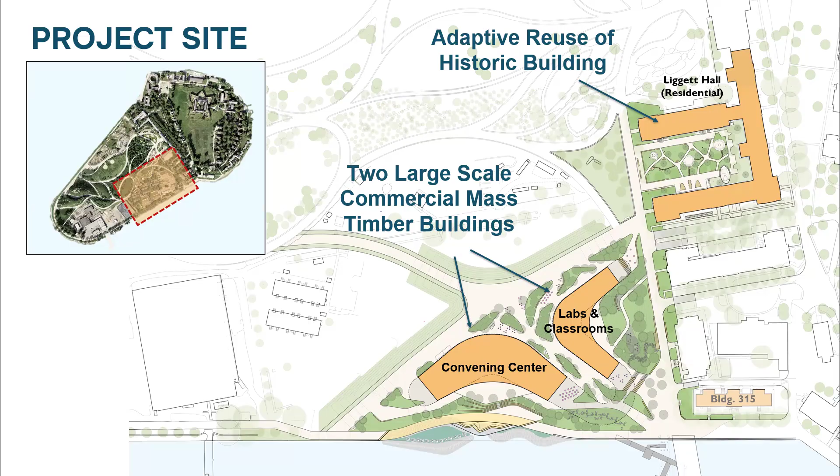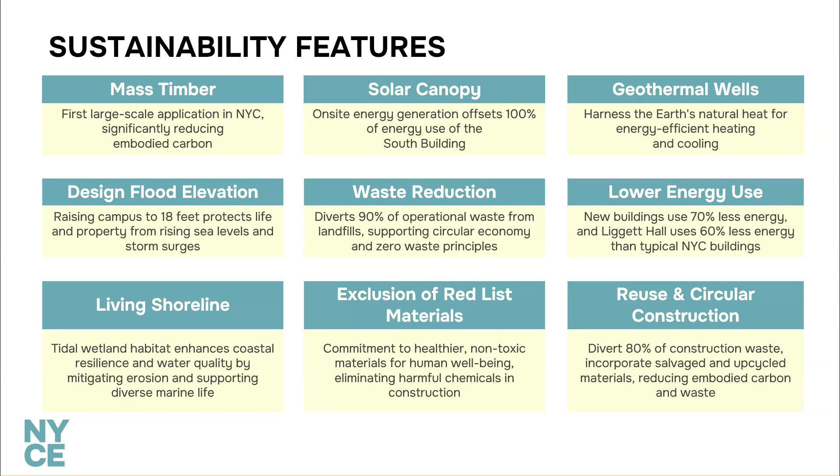We're doing Living Building Challenge, True Zero Waste, and the Waterfront Edge Design Guidelines, which create a holistic approach to building an example of what urban or regional resilience could look like at the waterfront. Most of the presentation today will focus on LBC, but these are also just part of the puzzle for us—we're doing a couple other certifications too.

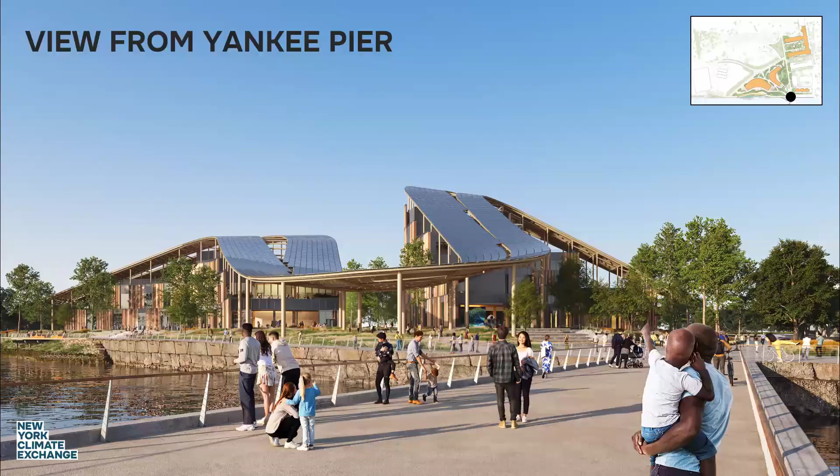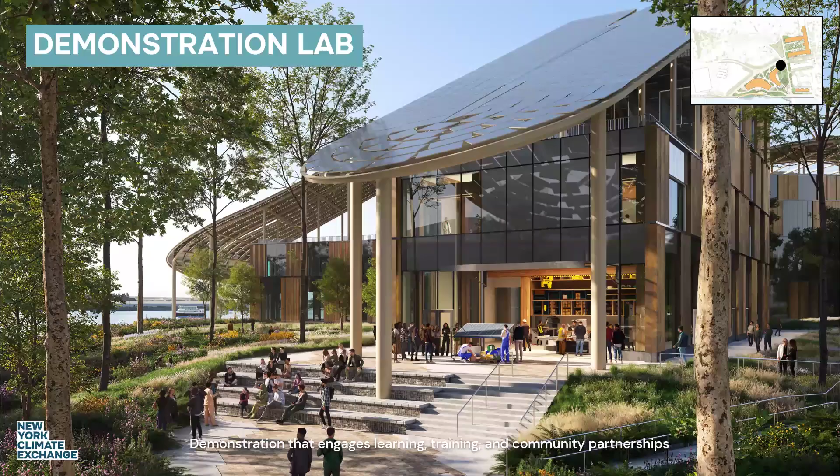Here we can quickly tick through these renderings of our project. We sit right at the pier where you'll arrive on the island—this is the convening space, the collaboration space I talked about. Our building is made out of mass timber. One thing we always like to say is that if you're in the convening space and it feels like you're at the 53rd Street Sheraton in Midtown Manhattan, we didn't do a good job.

Same with engaging the public at the ground level—visitors on the island who might not know anything about us. We want a porous ground floor to engage people just visiting the island, and hopefully entice them to stay a little longer. This is the academic courtyard. What you see here is a historic structure that will be renovated—it used to be army barracks, and inside it will become student housing and communal spaces for student life.

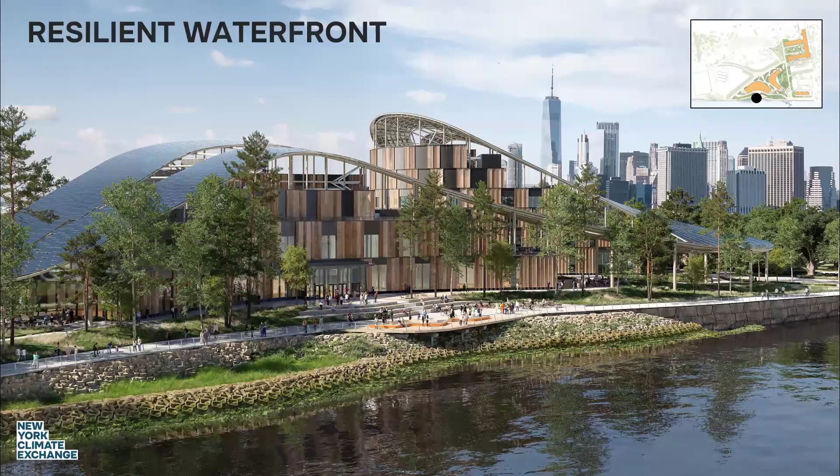This is a nice hero shot that I like because it shows this resilient waterfront that we're building. It'll be the first place on the island that breaks through the existing seawall that's there. We're not going to solve sea level rise with this patch of land, but we want to be an example of what development might look like at the waterfront. You'll see here the steps—we are elevating the campus to 18 feet above sea level.

So we're hoping to build a structure that's resilient over the next many decades to come. I think this is the last slide of the intro. I'm sorry, this has probably already taken up too much time, but it's always so fun to talk about our organization and our campus. But really, what we're here to talk about today is how we move from some of the goals and visions that our organization may have to action.

The New York Climate Exchange is focused on three goals. One is to drive innovation and scale climate solutions. Two is to really do it in a replicable way—we don't want to be scaling things and be the only one standing on the other side. We want others to follow the path that we're forging, so creating a replicable way to do it is really, really key. And then also inspiring and educating.

I think this really builds off of the energy of Governors Island already. You have to take a ferry there. When you arrive with a sense of accomplishment—like you made the boat, you didn't miss the journey—you arrive there, and it's like a portal where you arrive with your heart and mind open, I think. So we want to tap into that energy and really use this building to inspire and educate people about what is possible. We're going to talk about a couple of the ways we bring those goals to action.

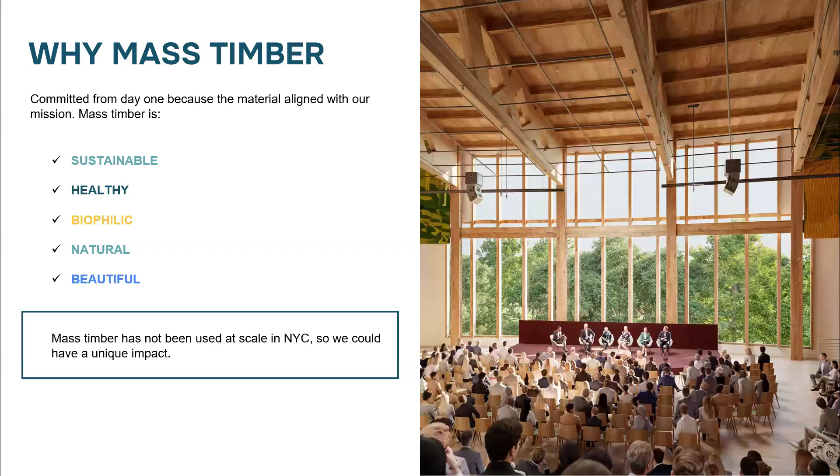Some design considerations were definitely discussed up front with mass timber. Considerations that were prioritized were really around circular building design as well as optimizing people's experience with the material—thinking about designing key assemblies for future disassembly, helping to extend the life of building components, and reduce waste, hopefully ultimately at the end of the building's useful life.

And if you click to the next slide—one more thing I'll say is that less is more was another one of our design principles: let's let the material we're selecting with intention shine, which is why these renderings are so heavy on the mass timber, and you see there's no drop ceilings. We will have some of those for code compliance, but we're really letting the material speak.

The team really sought to maximize people's experience with the material, as I mentioned, creating ground floor views of mass timber, allowing occupants and visitors to really connect visually with the warmth of the wood.

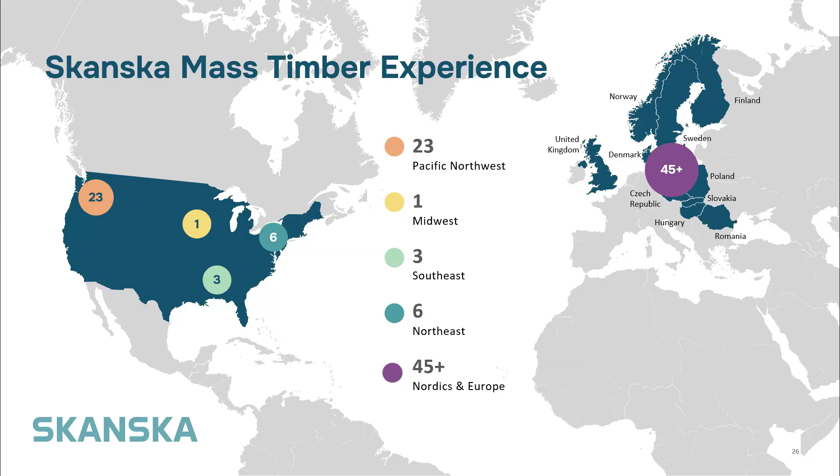Just quickly, I know this whole presentation is around innovation, but mass timber alone isn't super innovative. It's widely used around the world as a climate solution, and Skanska has built several mass timber buildings in the US and in Europe. But the innovation here is that New York City doesn't really allow for mass timber at scale.

So the innovation work here is really working through those regulatory hurdles of actually building mass timber in New York City. I won't get into all the specifics, but New York has a very conservative building code related to mass timber.

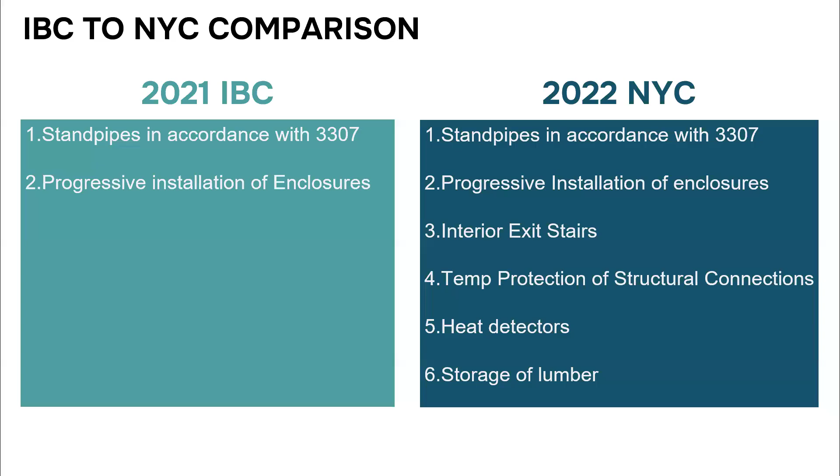I'll give some examples in a minute, but wanted to note this was the crux of what we were solving for when we engaged with the New York City EDC Mass Timber Design Studio. This is a program facilitated by New York's Economic Development Corporation and other partners, grounded in a commitment to advancing mass timber adoption in New York City through demonstration and technical innovation, public outreach, and structured engagement with regulators.

Through the studio, we were able to engage directly with city agencies, designers, and other partners to really navigate the complexities of New York City's permitting and regulatory framework for heavy timber construction. This provided direct coordination, strengthened coordination with the Department of Buildings and the fire department, really trying to advance practical solutions to implementing mass timber. One of the things we came away with was greater regulatory clarity and technical confidence from a lot of these conversations.

Most of what was discussed in the studio really related to two key regulatory components: the New York City code requirements above and beyond IBC code requirements, and the code's Chapter 33 safeguards during demo and construction, which is essentially how you can build in New York City with specific requirements for timber construction. Three major areas of focus came out of this for further discussion, and I'll run through a couple quick examples.

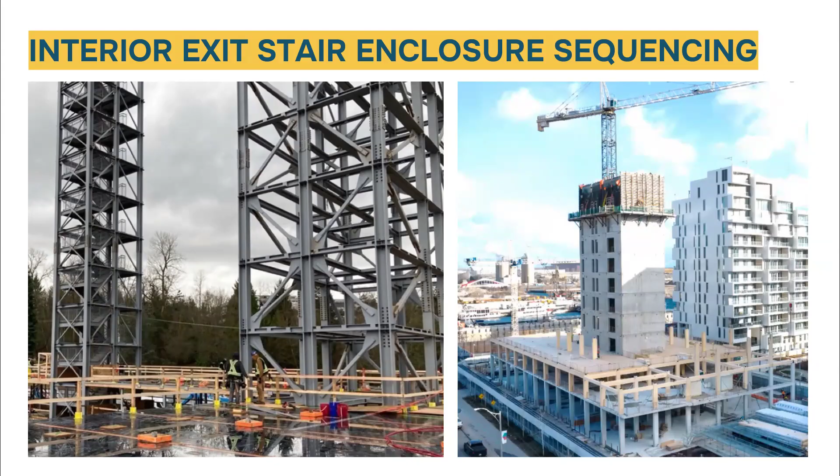The first is regarding stair towers. Our project has taken a hybrid approach where the building structure and the stair towers are integrated with one another. However, code typically requires these stair towers to be constructed independently. So this is something the project team continues to work with the Department of Buildings to discuss, in hopes that a hybrid approach supporting a more sustainable structure overall can be pursued.

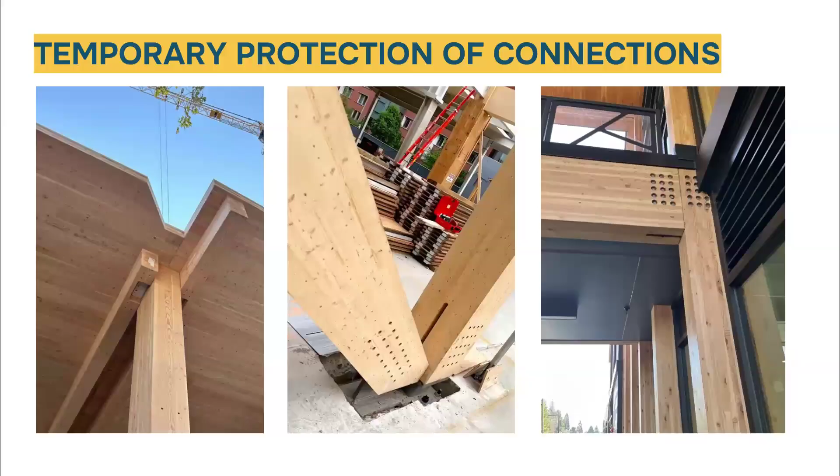The next example is related to temporary protection of connections. As written, code requires that each connection be fire protected at the end of each work shift — like fireproofing every steel connection daily if this were a steel building. This obviously presents significant constructability and sequencing challenges, and was certainly a discussion point throughout the studio on how to approach this practically. This is something we're working through with the design team, with ongoing coordination with DOB and the fire department.

The last thing I'll mention is related to storage of timber. As the code is written now, it only allows for storage of up to 1,900 cubic feet of lumber on site — basically two trailers at any given time. This is a particularly tall hurdle because we're on an island, which already limits delivery flexibility and increases logistical complexity. So we're discussing this issue, explaining potential approaches to sequencing, staging, and temporary protection, and hoping for further clarification as we progress with the project.

And I just want to double click on what you said around coming out of this process with practical solutions.

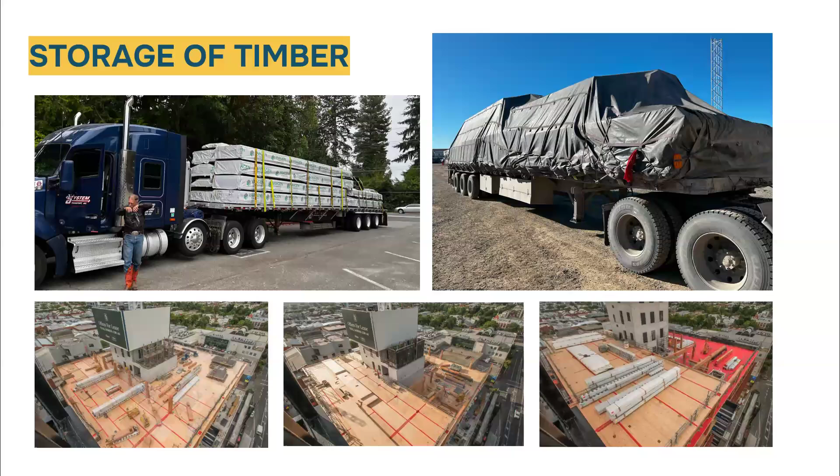I think one thing that has been clear time and time again is that for this general status quo developer to pick the sustainable option, it has to be practical, it has to be cost effective. We cannot have all these complicated rules that make building in mass timber so expensive that nobody in their right mind would build mass timber. So I think that's really what we're trying to do: we're trying to de-risk and make it economically viable to use some of these things that may be innovative only to this region or maybe innovative in general.

Great point, Elfmina. So I'm going to go into the LBC requirements, and specifically what is our project profile on LBC, and then how did we approach it innovatively.

So this is a big chart. We have 3 main projects: the south building, north building, and adaptive reuse. We are pursuing South Building full living building challenge. We won't be able to get the water petal, but we are still pursuing all of the imperatives without the water petal. Our site isn't big enough to do a wastewater treatment, and we felt like because we are on an island, hopefully the island will choose that technology in the future. So it is plumbed for that future hookup if that ever becomes available.

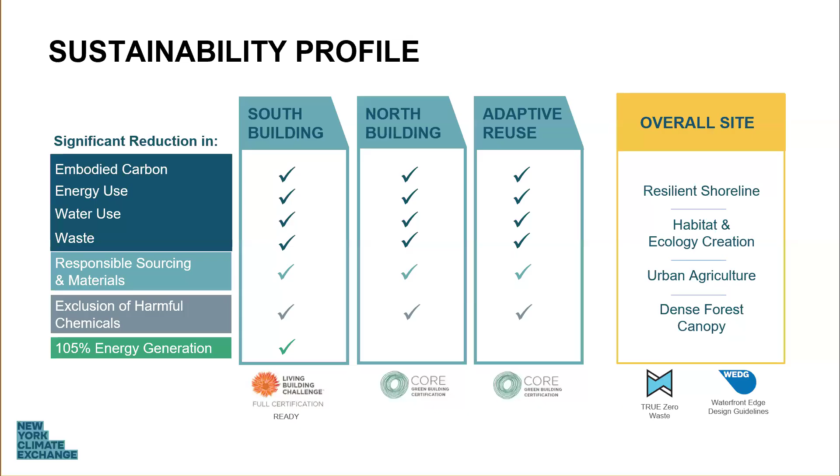So dropping down one level of what's scalable and what's innovative, the LBC pursuit asked: what is the biggest environmental offender in the construction industry today? I can remember sitting in that meeting and Andrew and Elfmina giving this question to our architect, and them being like, we like this, let's go back and really think, because for many years, probably for a decade, carpet has been the thing that our industry has attached itself to as a huge win. But what's the next product? So we challenged SOM with that question.

And this is what they came back with for what is the biggest offender: site, building, interiors. They said we've got to do this beyond the site, looking at the interiors, looking at carbon footprint, as well as the health.

Because LBC is very heavy on red list free materials. So for site, we came back with concrete paving and water usage. For buildings, of course, steel structure, concrete floor slabs, glazing exterior envelope, and then for interiors it's excessive assemblies, rapid replacement, and chemicals. Those were the biggest offenders from these 3 categories.

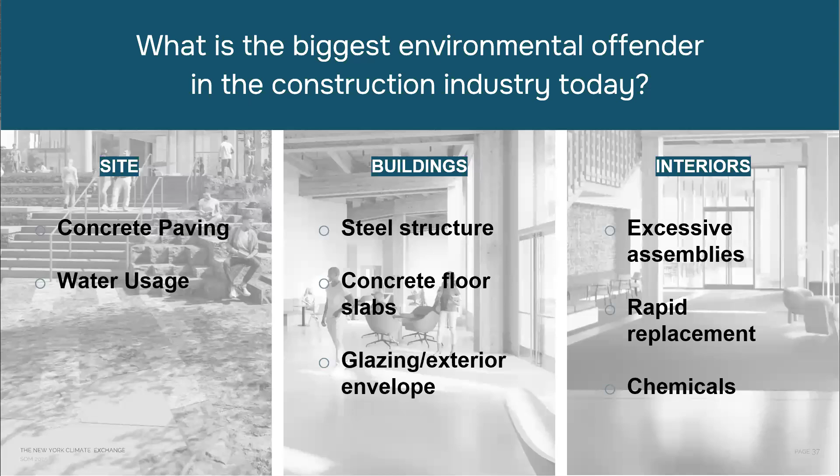Their proposed solutions for site: low carbon concrete, which is not necessarily an innovative product—over the last couple of years we've seen different iterations, which we will get into—one of those being waterfront bioconcrete, and then no plant irrigation. Not innovative, but still something important to hold on to.

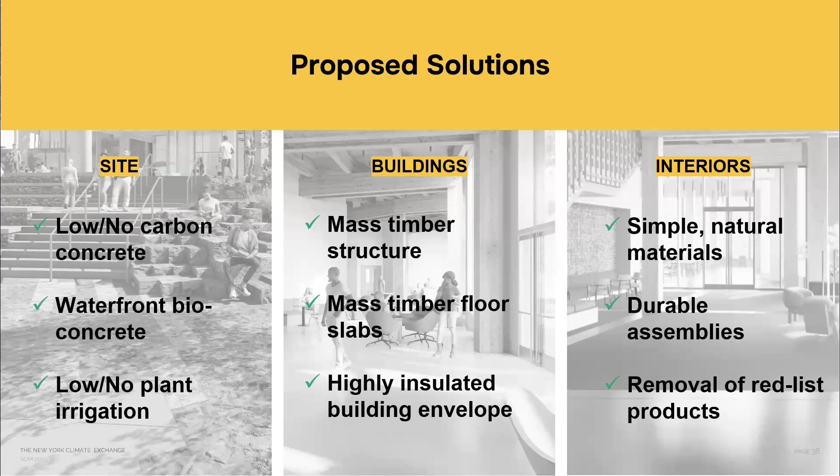For buildings: mass timber slabs, highly insulated building envelope, and then simple natural materials, durable assemblies, and we had to remove the red list products from the building. So our transparency went beyond typical product info.

Anybody that has done an LBC project, the materials—we as a team always said we had an 8-different-sided Rubik's Cube. How are we going to solve this by meeting the red list free requirement, by making sure we had declare labels, by living product challenge? And on top of that, our client is asking for innovation.

So we have had hundreds of conversations with manufacturers. This has been a very collaborative process, and advocacy has been hit hard for this project. Again, I don't think that's innovative, but I think the level to which we went to make sure manufacturers knew what we were looking for is the part where the exchange is like, yes, go one step further so that we can make this easier for other project teams.

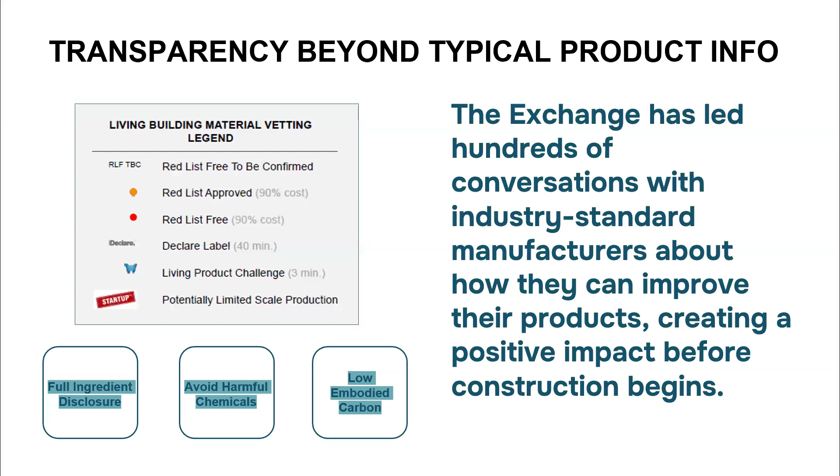Just to give you an idea of what the numbers look like: for red list compliant, we had about 1,000 products. We had to avoid 90% of red list chemical classes within our building. So you can see—you can take a screenshot and look at this later—the compliant side, the non-compliant side. We're still working through that even after CDs, just to figure out what we can do to make sure we're really meeting that 90% threshold.

Responsible wood sourcing - this is the mass timber, FSC certified. We broke it down by building. This was a little bit easier because everyone on this call has been doing this work for LEED especially, probably requesting those chain of custody certificates. So this is not as fancy.

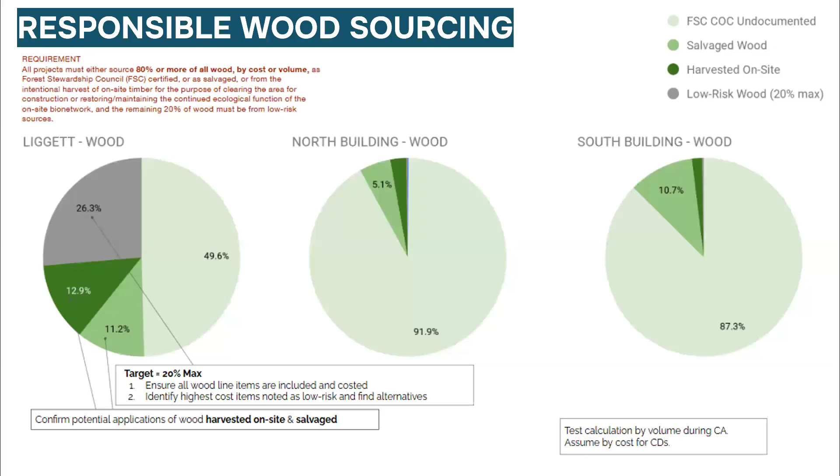This, though, is where it's really so small that you don't need to read it. But you can see all of the different products and the cost drivers that were pushing a yay or nay on if we could afford it, if it came within schedule, and then it met our requirements for LBC.

We have done a lot of vetting, an iterative process with Skanska. At one point, I think they were pulling out their hair because we were like, can you price this innovative product? But this is all to say that the iterative process was necessary in order to get to a building that does hold innovation of products.

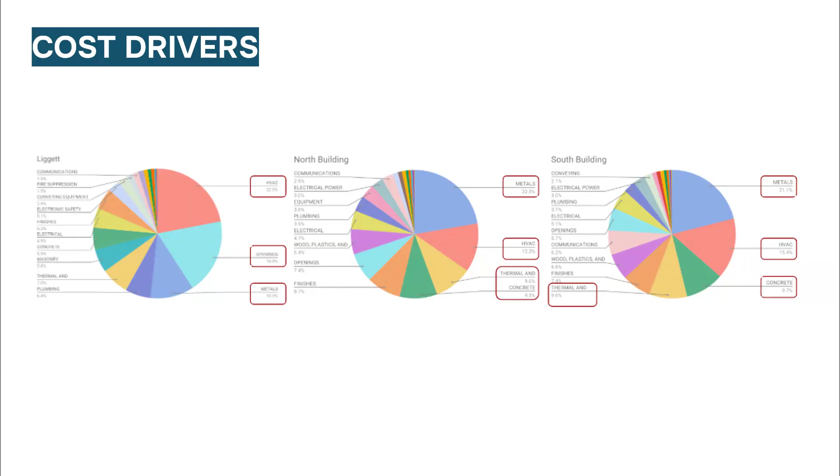So the last big part of this is specification directive - to write an open source spec, which I think hasn't really been done for LBC. If anyone's on the call that's done an open source spec, please raise your hand because we'd love to talk to you. But to have multiple products that comply with LBC requirements is tough, really tough. But we also want to have an open source spec, so we had performance. We had to really hone in our directive.

So all materials listed in the specification will be at least vetted for LBC compliance for the first four. Living sourcing, which is where the location is, was not necessarily vetted at this point in time. The second layer was products that are compliant at minimum will carry a basis of design - where possible, there were alternates listed, but at least the basis of design was vetted and compliant. And then products that are compliant with exception, which is determined by the LBC rating system, we will have three of those products listed, and we'll do the due diligence on the backside with Skanska and the subconsultant.

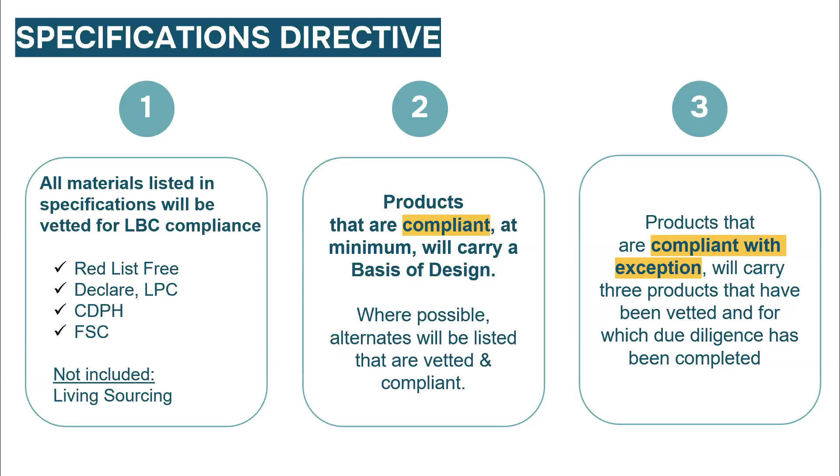I guess I'll put a bow on this - the magnitude of vetting products and innovation was a big push of the design team. But I think when you work together, especially with a contractor that is so willing to support that effort of pricing and balancing the cost and the schedule, it really can work.

I just want to reiterate, a lot of this vetting obviously happens on the design side, but it's the CM's responsibility to really advise on building out the contract docs so that we can successfully procure the products that we want, enforce the sustainability requirements, as well as making sure that we're creating a project that is financially viable and competitive.

Okay, so innovations log, salvage materials, experimental materials - this is you, Angela. Yes, perfect.

So speaking to material vetting and sustainability requirements in the contract docs, but kind of moving beyond the LBC requirements, the next innovation pathway we outlined is really around the project's innovations and what we're calling the experimental materials tracking process, including a focus on circularity and salvage. Given the mission of the exchange, pushing innovation was at the forefront of the project from the very beginning, and I will say it's remained a core focus of the project, regardless of budget.

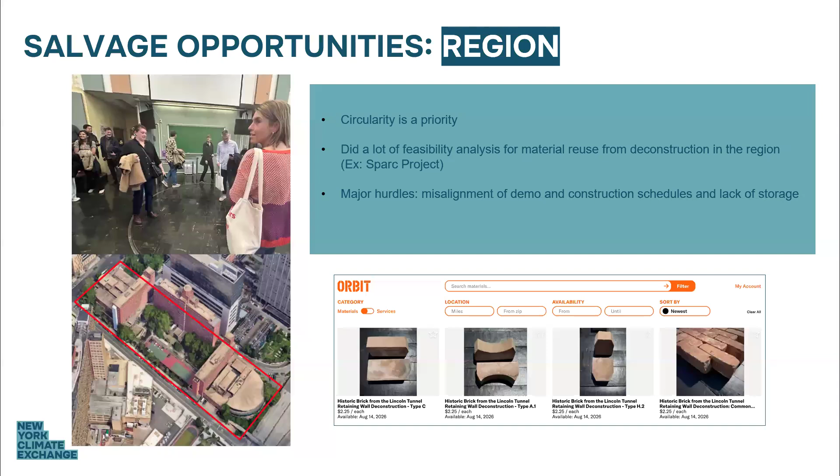Totally. And that's really something I think is the government's responsibility. I would pose it's the government's responsibility to come up with a regional solution, or tackle it at a regional scale, which is what Angela was talking about earlier with the mass timber studio. There, New York City decided, okay, mass timber regulatory issues, we're not going to solve project by project. We're going to have a framework, a process, something that's organized to deal with it at a regional scale. So here we just need a similar approach from the New York City region to do that.

Yeah, absolutely. And just very briefly at the site level, continuing on the circularity conversation, finding ways to reuse existing trees for furniture and materials from the existing seawall on site as landscape or furniture.

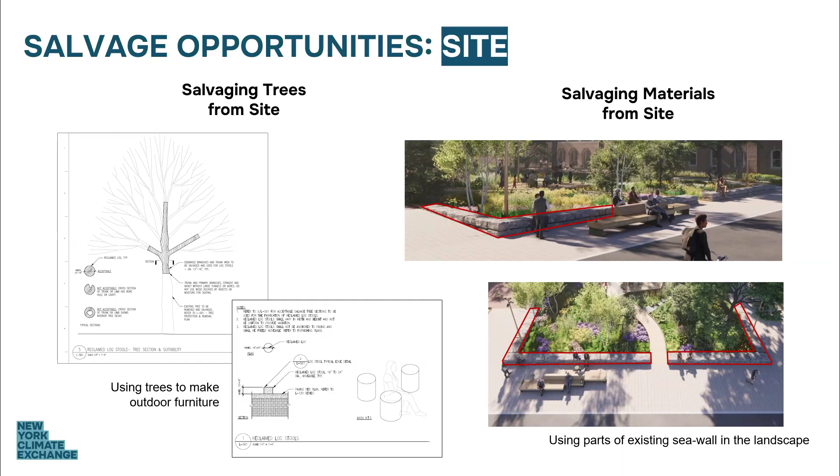And I'll say the project team really explored salvage opportunities beyond just targeting a few materials. We really took a holistic approach to integrating salvage and these experimental materials throughout the project, which required close collaboration, as Allison was kind of hinting at, across the team. And really truly an iterative process to evaluate the different options, refine the strategies, align the decisions with our project goals, and really work to balance our sustainability ambitions with cost considerations and overall design intent.

Something besides salvage that we worked through was around experimental materials, and the exchange and Allison were really pivotal in pushing forward these efforts. So how can we look at incorporating these different materials as a way to showcase emerging technologies and really forward-looking climate solutions within the project, and really try to create opportunity to demonstrate how these new materials can help reduce some sort of environmental impact, but also support the project goals and position the project as kind of like a testing ground for scalable strategies.

That could inform future development. Yeah, because what we see with sometimes experimental materials is they don't have the performance criteria that high use spaces really need. So I think the approach is that you can't sacrifice performance for something that's more environmental on some scale. So it's like, what's the biggest offender, and how do we still meet performance and budget through that?

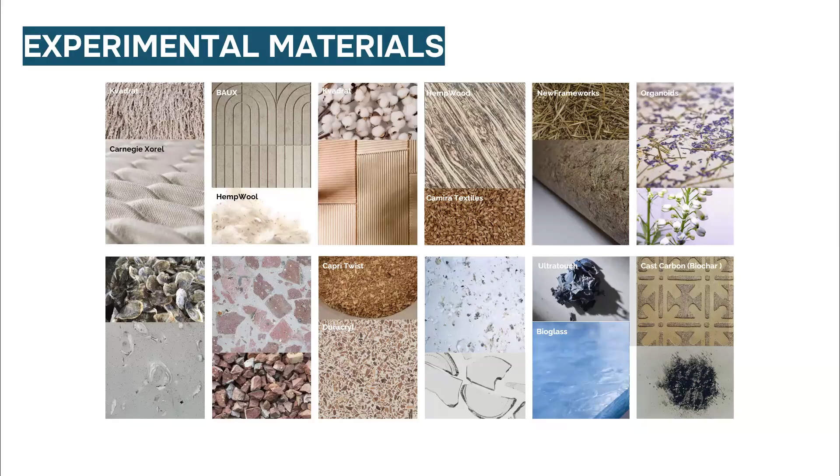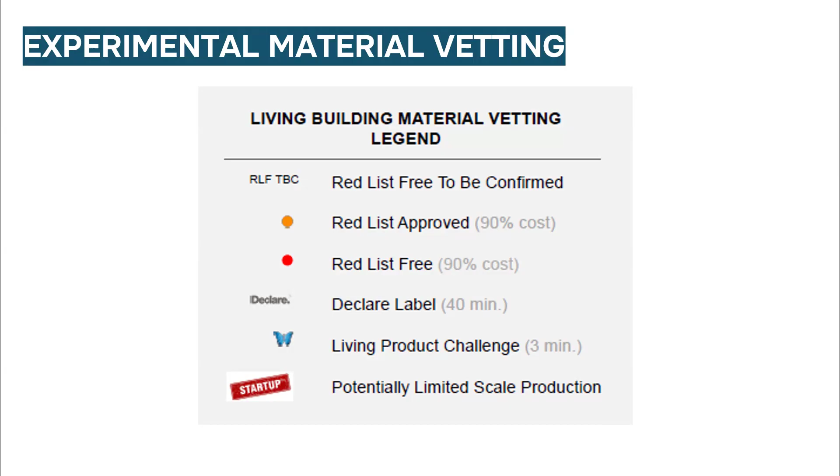And then as we worked through these exercises, they had to be completed through the materials vetting lens of LBC, which also really helped shape how materials were evaluated and selected. So again, trying to push innovation, but also aligning with all of the other certification frameworks and other requirements. So we could just flip quickly through a couple examples.

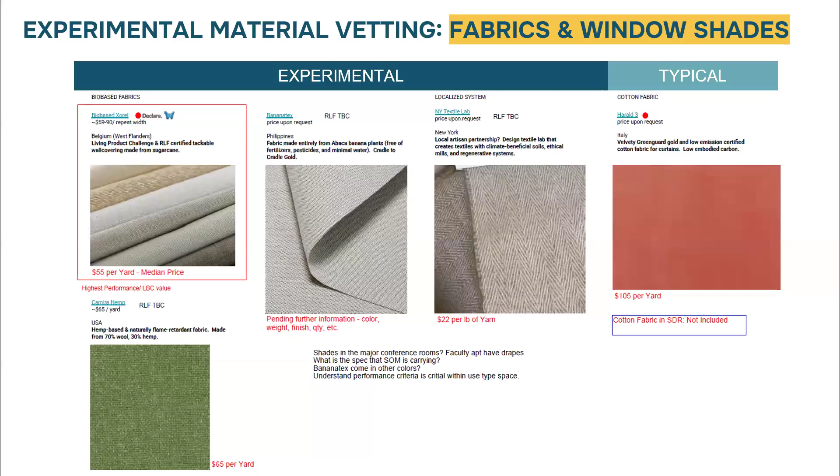These are just some screenshots of the different materials that we evaluated as part of this experimental pricing and evaluation exercise. So this is just a couple. There's window shades, we worked through insulation, furniture, flooring, a lot of the other resilient flooring, interior, and building materials here.

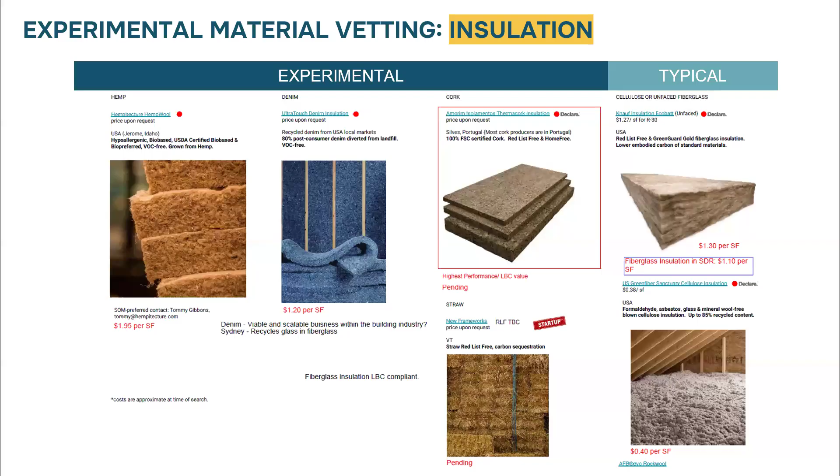Okay, you're up, Elifmina. Yeah, I'm happy to talk about our last innovation pathway. As you've heard from both Angela and Allison, we've already tasked both the design and the construction team with bringing in innovation in every little possibility that they can.

But just in case there was some scalable solution that we haven't yet crossed paths with through our mandates for our construction and design team, we, as the exchange, partnered with our programming team to come up with this open call, for companies who have breakthrough technologies in energy, water, waste, and materials to submit their ideas to this open challenge.

We got about 100 or so applications. 44 of those were from the New York City region, which was exciting for me because I live here, but also for the exchange because we want to support local economies, whether that's jobs, innovators, or businesses. We really want this to be the center for that climate innovation piece. Seeing those 44 applicants from New York City got me excited, but that means half of the applications were from outside of New York City, which was exciting too.

I think we can move on to the next slides. The other numbers I'll get into in more detail in the next slides.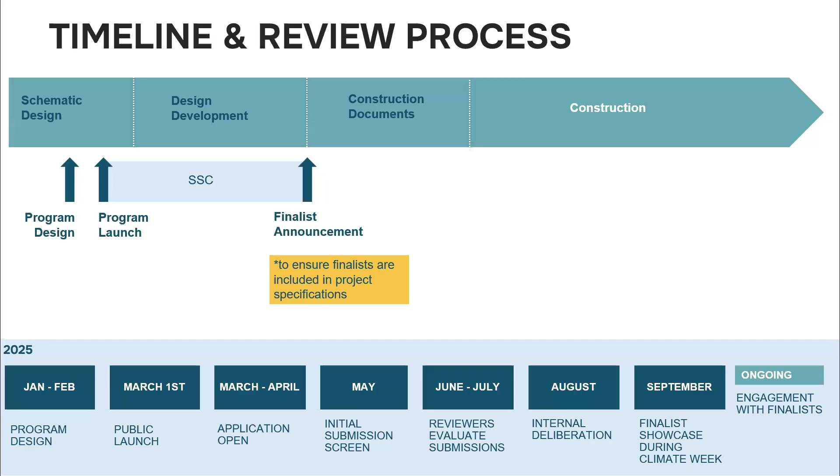I'll go through this briefly, but we had a range of applicants from a whole bunch of things. Of course energy was a big one given the state of affairs of the world, waste, water, and building materials - I think those were the top. And then there were some more interesting things for engagement, some pilots for air quality monitoring, some gamified solutions, things like that.

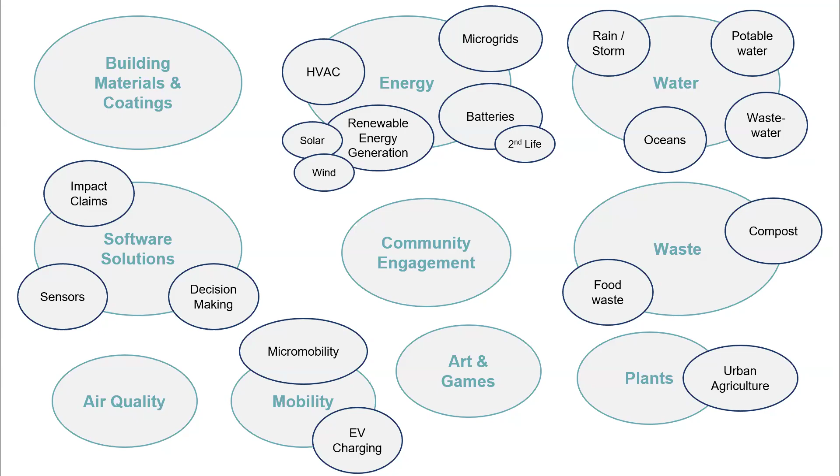And at the end, from about 100-105 applicants, we selected about 20 finalists, and we put them in two cohorts because, again, we were really focused on this issue of timing. We felt like six or so of the finalists were in this urgent category - we called it materials, because we were in the process of writing the specs for the project, and we felt like these currently feel relevant to where the project timeline is.

And then we had a cohort two finalist group that was really a pipeline, I guess, for the exchange to be able to work with moving forward, because these were more operations things - becoming future energy ready, but maybe code regulations don't allow batteries yet, though it's a battery related technology, or it's something we could pilot once we're operational. At this moment in time, it's not that we're selecting the material for this tile and this would be a good company.

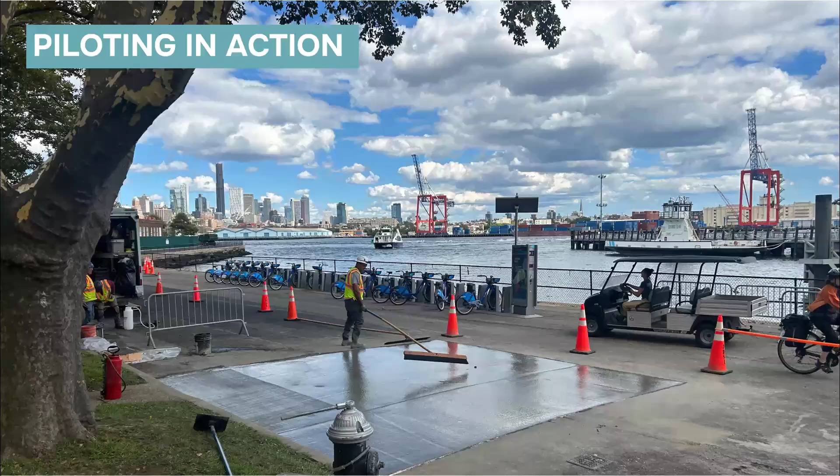But the more exciting thing to talk about is that one of our finalists was an algae-based green concrete mix, and last summer, towards the end of the summer, we did an on-site mock-up with this company to install the largest application to date of their algae-based carbon negative concrete. This was maybe the beginning of a process where we went through with our design team and our construction team to evaluate how this product performs in the real world, in a real winter condition, with real maintenance vehicles driving over it, and also lessons learned around scaling innovations.

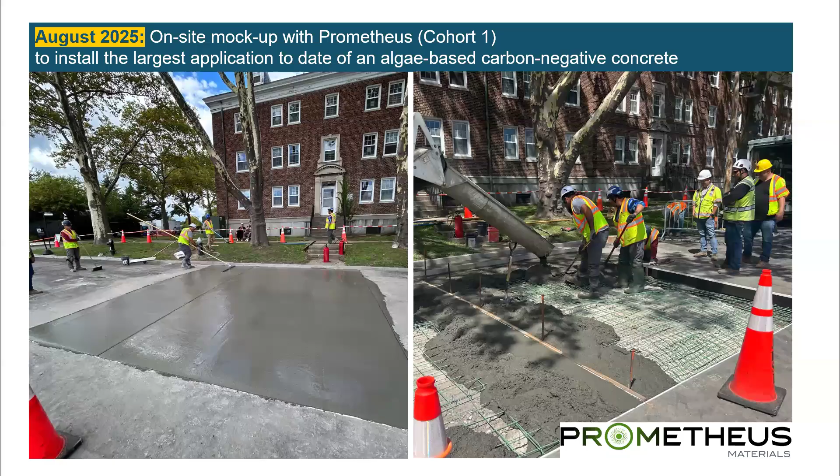This product, we would be the first customer to use it in New York City and also at the mix design that we're proposing. Because it doesn't exist at scale yet, part of the lessons learned is what happens when you're doing a pilot where maybe the mix isn't perfect, because you had to bring the truck on site and do it quickly there instead of in a lab environment in a manufacturing facility.

I think somebody recently put a similar comment on one of the posts, that the partnership structure here to implement a pilot like this is really the interesting part. Unless all of the partners that we are bringing together come together, these innovations often end up failing on the spectrum of getting from pilot to planet.

I think it was really fun and interesting to document what that collaboration looked like, how that process was. I hope it's transferable to other projects. I recently heard the term 'projects that are first of many,' so I hope we are a project that's the first of many.

And with that, maybe this was the last slide, right? Yeah, we can probably open it up to questions, or I'll pass it back to Tristan.